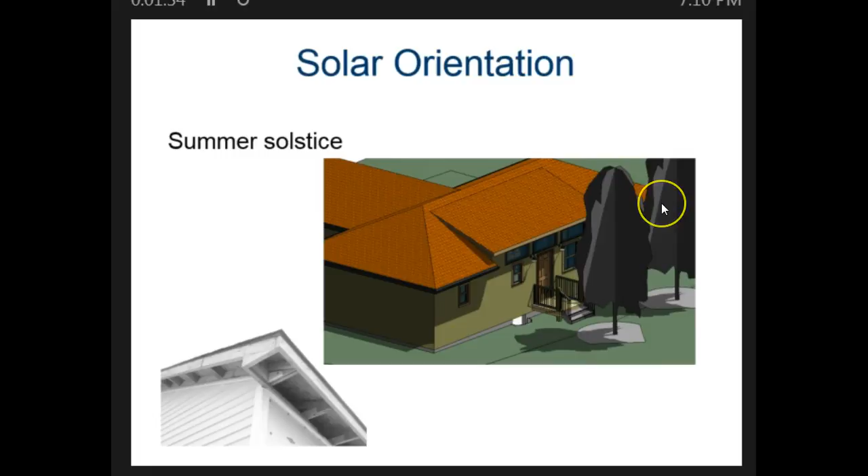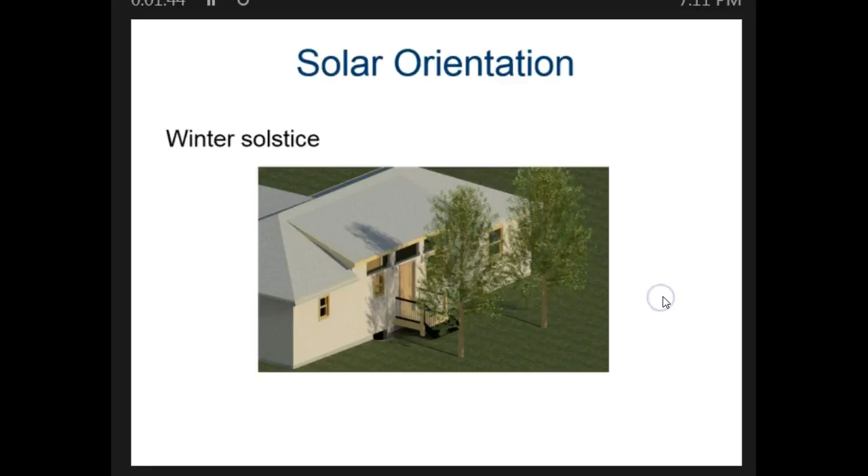We want to be sure that in the summer, our trees are on the west side especially so that they are blocking the sun. Here's these same deciduous trees in the winter where they're allowing the sun in. During the winter, these trees will maybe be letting in extra light up here.

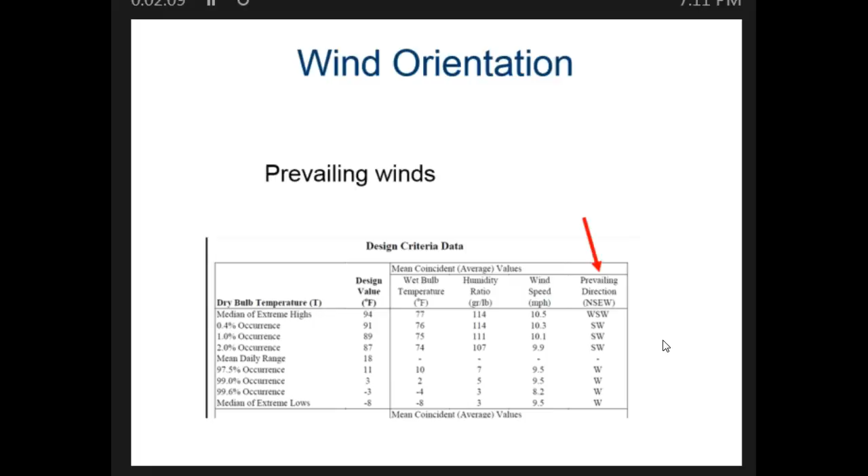We're not going to really talk about the prevailing winds yet because that's not really a big concern because again, here in Texas, we're more concerned with the summer than the winter. But if you were building something in a northern area, we'd be more concerned with the wind protection, with the wind causing the houses to get very cold in the winter.

In that case, we would be adding conifers, which are our pine trees, because they hold the leaves, or our cedar trees, they hold the wind, and we'd be concerned with putting those on the side where the wind is going to be hitting our houses. We're not as concerned about that here in Austin, so we're not going to worry about that right now.

Our houses are not going to have a garage on them, but if we were putting a garage, we'd want to put the garage on the side to create a buffer for winds coming at the house. If we're concerned with winter winds causing the house to cool down a lot, we put the garage on the side where the wind's coming from so that it's hitting the garage and not cooling the main living areas.

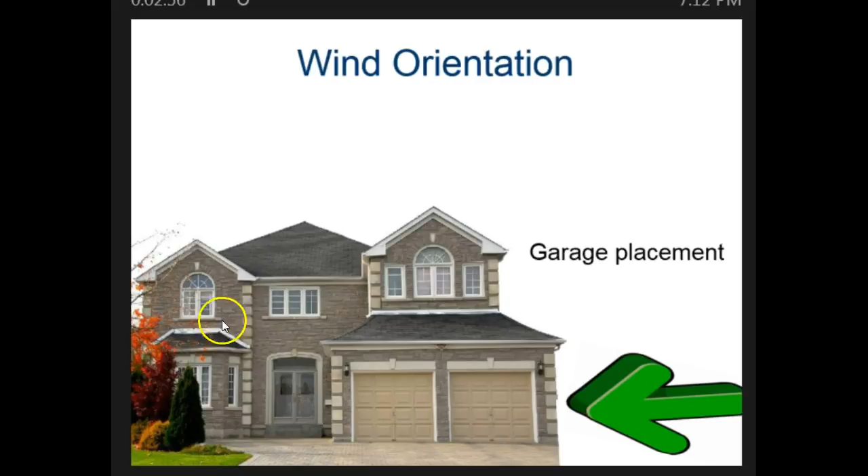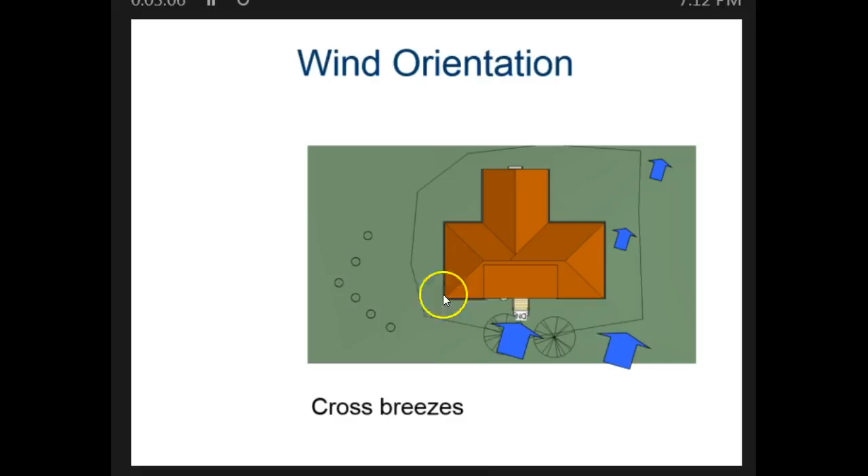And we look at cross breezes. We don't want to have the wind hitting the house in the winter and cooling it down. So again, berms are like these little hills of dirt. And then these conifers, and they put them up to cut down on the wind.

Notice this is the side where the wind is coming from, and they have very few windows here because this is the side we don't want to have cool down so much. These kind of berms and lack of windows on the side could also be used if this was a very busy road here to cut down on unwanted noise.

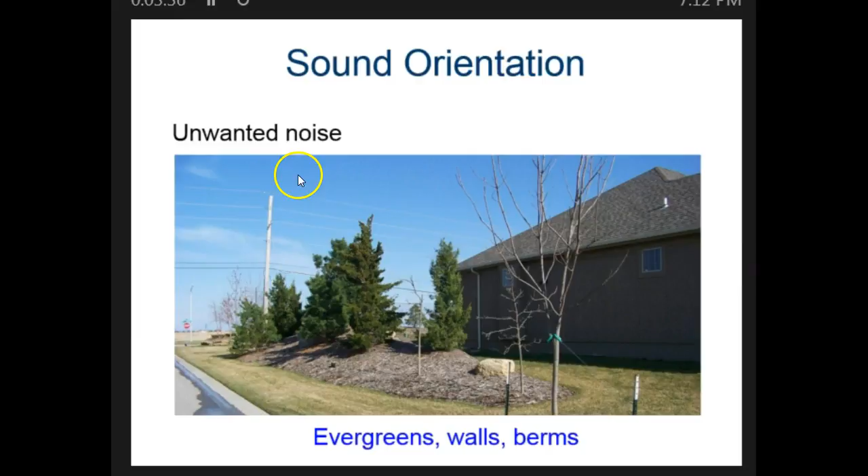Also, sometimes they put up solid walls or fences. We're not going to be putting a fence on our house for Habitat for Humanity because it's not a requirement for Habitat for Humanity. But if you're doing some other kind of residential construction, you would.

You might want to think about what kind of views you want out of your house. When you think about your client survey and what kind of people are living in your house, you put together their interests and such. Are these the kind of people who would be interested in seeing sunrise in the morning? Do they have jobs where they're up early? Are they someone who might enjoy the sunsets in the evening? What side would they maybe want to look at?

Our house is going to be in basically a residential area, so we're not going to have a lot of hills. But if we were creating something in a country setting with more hills in it, we would be concerned. Even around Austin, many of the areas are very hilly as you go out to West Austin and out toward the hill country over by the lake, where this might be a consideration around here.

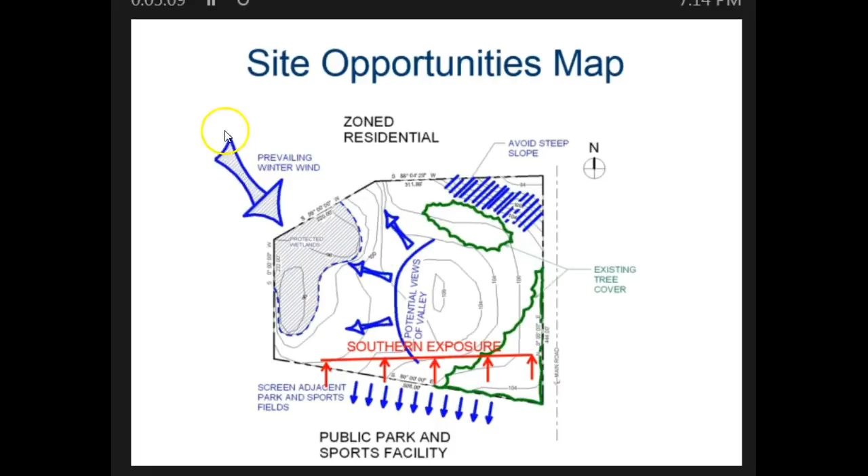And then if there's existing features. As I said, our house is actually going to be in a subdivision location, but if there were already existing houses, trees, creeks, etc., we'd want to consider that when we were designing our house. I'm going to be giving you the site plan for our actual house, but these are the kind of things you might consider when you're starting to build one. You don't want to build on a steep slope. Where's the wind coming from? Where's the southern side, etc.

Landscaping makes a difference as well. When you start making these decisions, what kind of climate are you working in? Are there native plants? We know that Austin often has drought situations, and we're concerned about that. What do you need to do?

Where are your utilities located? We are going to have those on our building plans, and I'm going to show you those on our plans when we look at them. And you are going to have to be tying your house into the utilities, so it is a consideration.

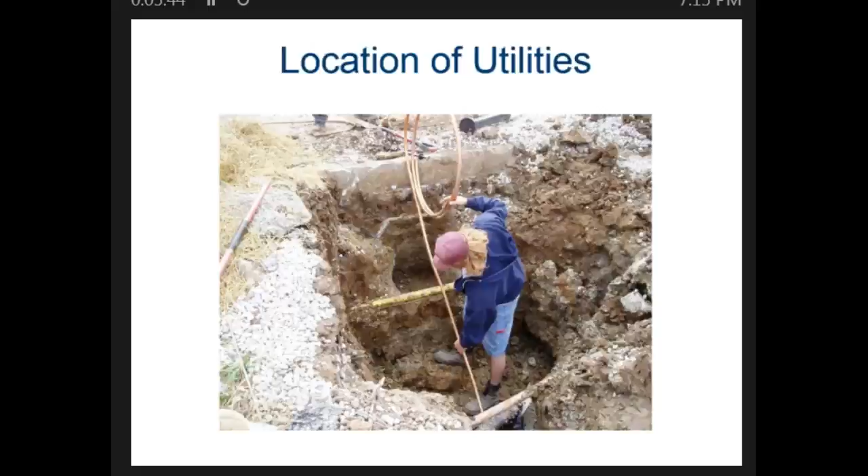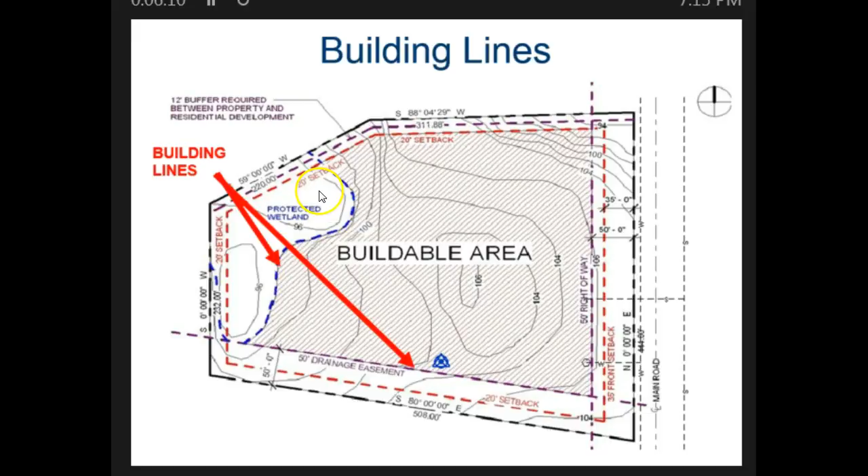For instance here, where are the actual lines for how far back we have to build? Just because we own the property doesn't mean we can actually build the house right on the property line. There's an amount you have to set back. And again, we're going to look at that on our actual project site when I pull that up in a minute on another video. Sometimes you can't build in an area even though you own it because it's a protected wetland, drainage easements, etc.

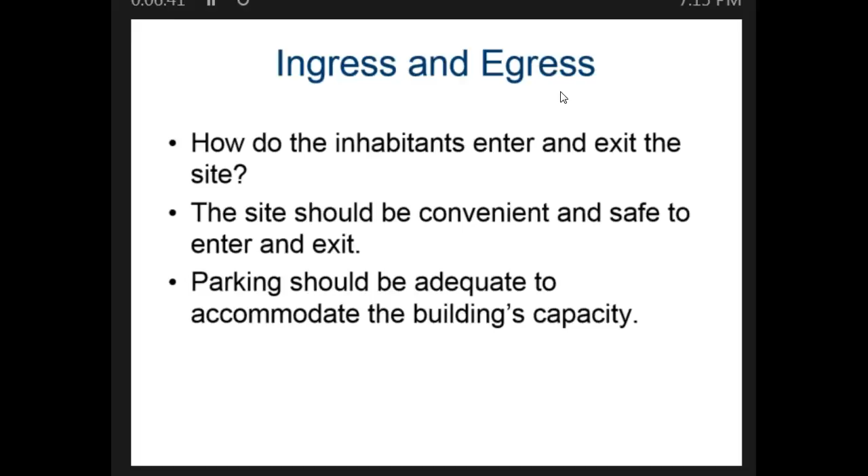Ingress and egress are two words you're going to become very familiar with. Take a second and you need to write these down in your notes. Ingress is how you get into a building or into a site. That's the driveway in this case, or it's a door leading into a house. Egress is leaving the house or leaving the property. And if we're talking about a commercial site, it might be a whole parking lot that we're coming in and out of. In the case of our house, we're going to be putting a driveway in.

Sometimes you only have certain areas where you can go in and out due to fire hydrants, stop signs, that sort of thing. And in other cases, it's because the zoning in the city has said these are the only places where you can do it. So you have to keep that in mind as well.